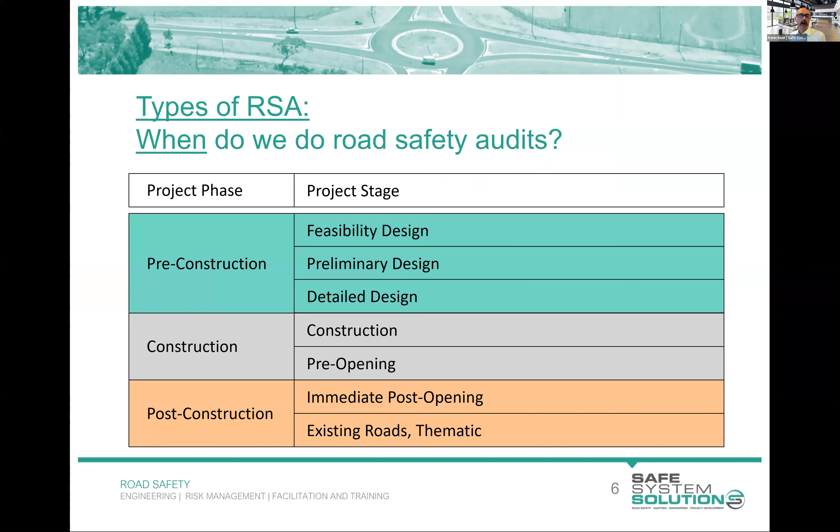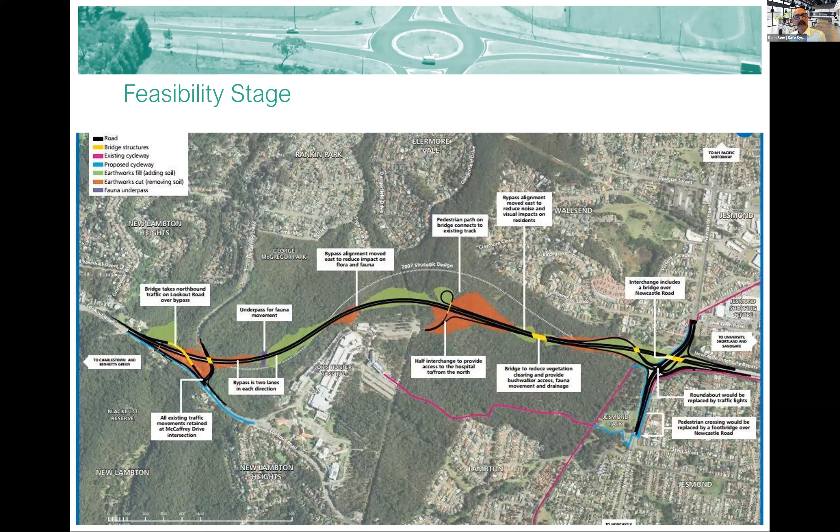And I took you through explanations of each of those, with the feasibility being the big picture planning type audit, where you don't often get much detail at all, but you're thinking about movement of people around here and different road users and the way this might change travel patterns and things that might just create a bit of risk there. Preliminary concepts, a bit more detail, and starting to get into thinking about these things. And the detailed design, obviously, you're given a lot of dense information.

Detailed designs, in one sense, are very hard to do the road safety audit on, because you've got to interpret all this technical information and work it out. But in another sense, they're kind of easier, because you do have the answers to a lot of the questions you might have at the earlier stages. If you're back here, you'll be asking lots of questions in your mind about lane widths and different drainage setups or lighting, and they just wouldn't have answered these. They wouldn't have got to that detail of thinking. So those could all be issues, but you wouldn't know. When you're in detailed design, you get all that information, but you really have to spend the time poring through the details of these designs and interpreting what they're doing and making decisions accordingly.

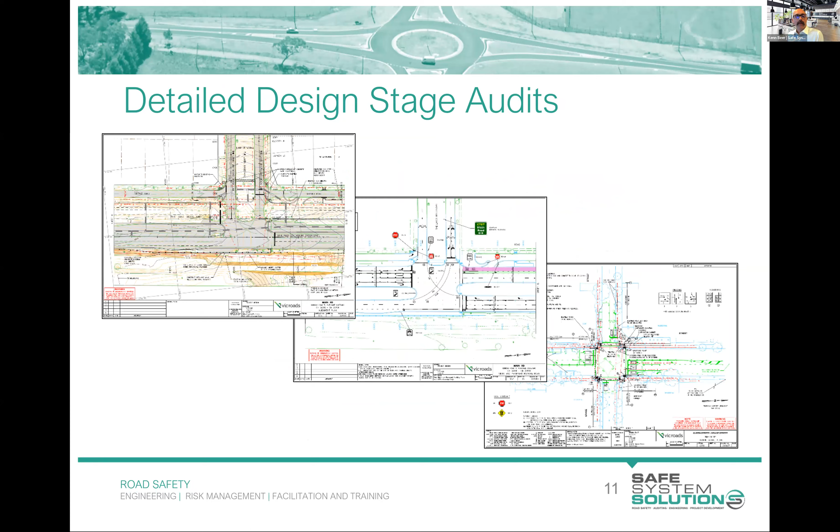This one I didn't have time to do last time. We were just talking about drivable culvert end walls, and the fact that we certainly know we don't want end walls like the top there in the roadside, because vehicles leave the road, they strike these, and we see some pretty horrific incidents. So we want to put in these drivable culvert end walls so vehicles, if they leave the road, navigate across that. But the little kicker is that there's actually two types of drivable culvert end walls. You've got one for the perpendicular and one for the parallel culvert. And so you can see the difference there.

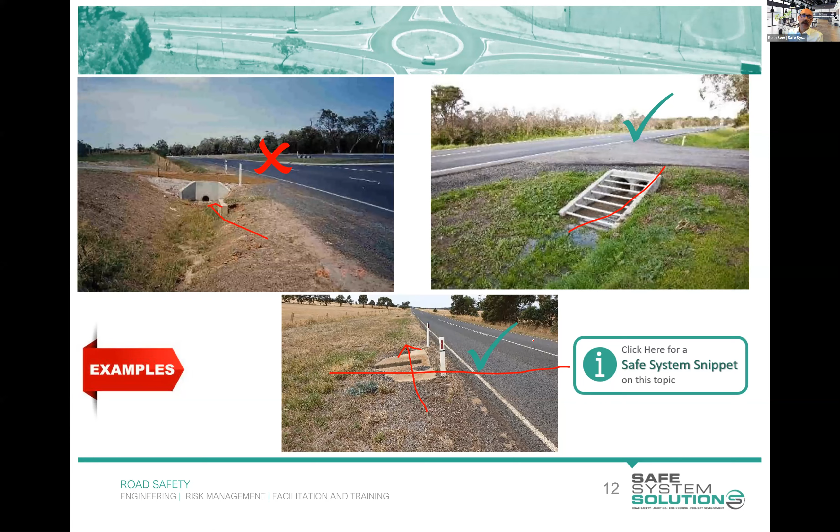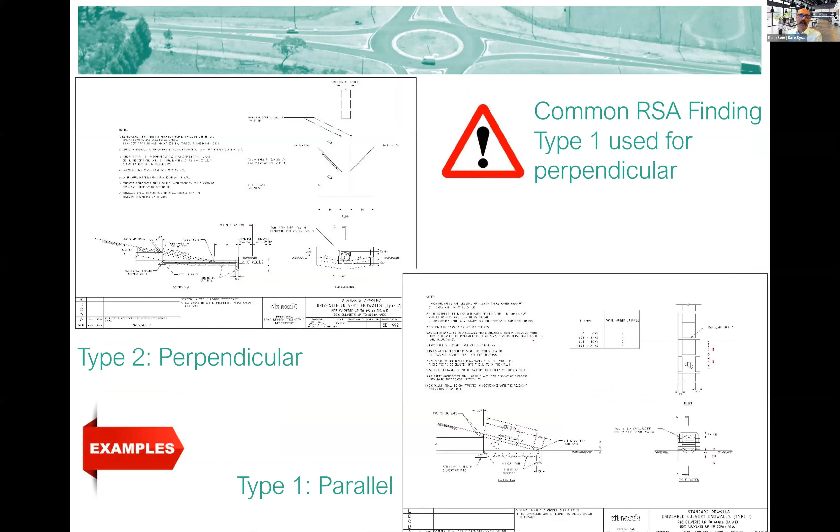They've got these ones correct, but you have that one for when your culvert's going across the road, and this one running parallel. But one of the really common things we see in detailed design is the choice of the wrong culvert in the design. And so the installers aren't really thinking. They just go and buy type 1 or type 2 as per the plan, and then they install it. But in road safety audits at detailed design, these are the kind of very specific things that you can pick up.

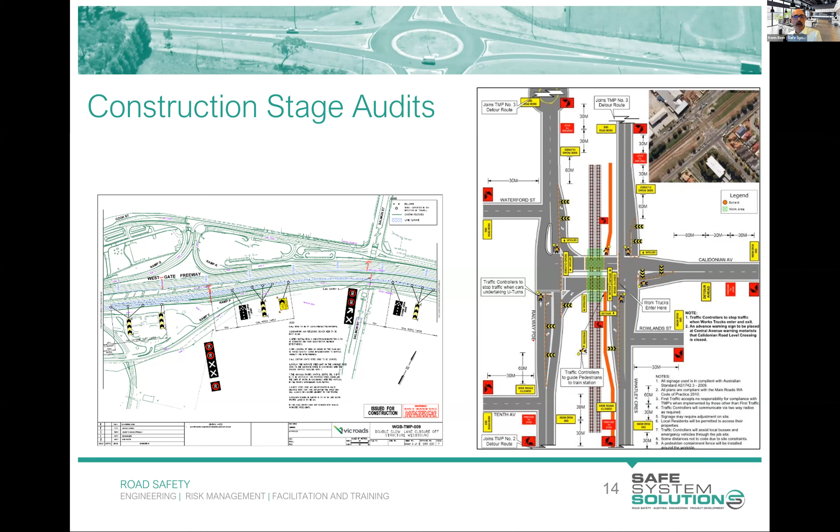Construction stage audits, as I mentioned, are really for the big picture, the big construction sites. If you're just doing a small bit of work on a local road and it's getting traffic management, I think it is just overkill to do a road safety audit, right? Unless there's some very risky thing, but really the surveillance officers and anybody out there managing the site should be able to pick up those things. But if you're doing big works on major roads and freeways and big, long-ish term changes, we really should have that full-blown road safety audit process through this.

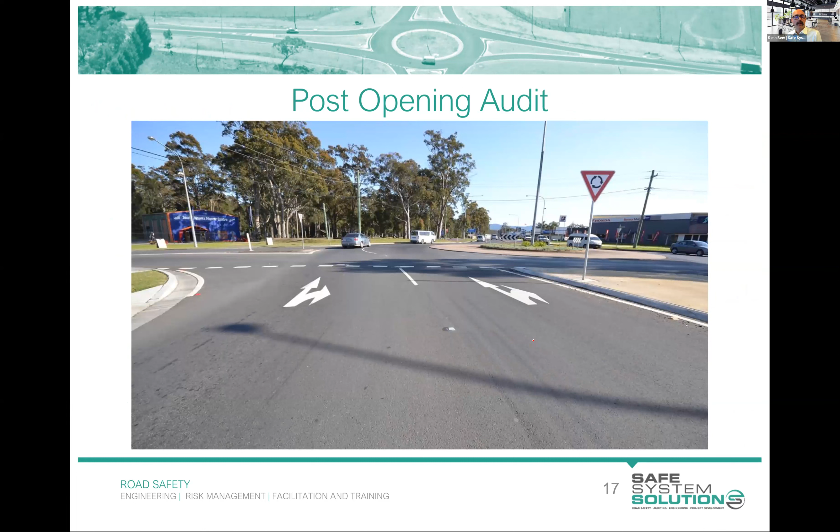Pre-opening, you're really checking a whole lot of things that have been installed and making sure that they're not going to present any issues, that they're installed correctly, but also that there's nothing that's emerged that was unexpected. And we saw this little one, which you picked up quite well there, the stencil the wrong way around. And I talked about existing conditions audits to finish it off.

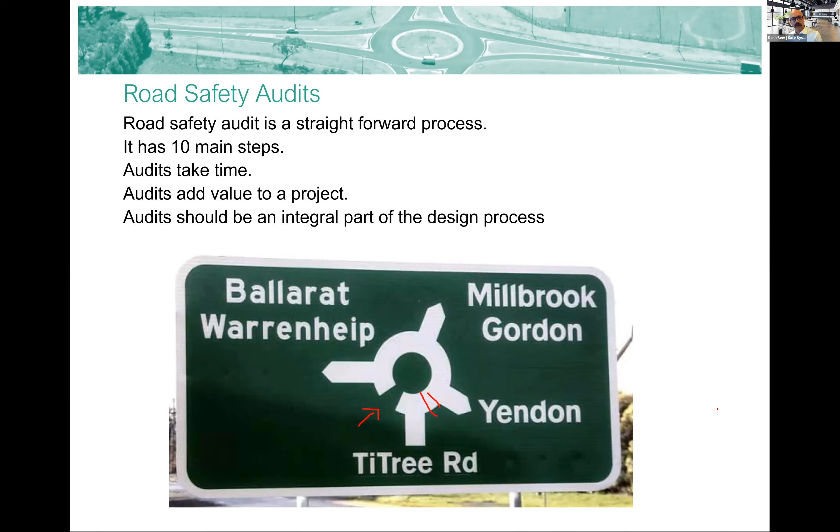Now, this is a very nuanced, specific thing, and I'll come back to this sign and talk to you about how we would think about this as a road safety auditor. Like, is this going to cause death and serious injury to our community? Probably not. Okay. But it's not right, and it's got some sort of implications. So let me come back to that. I'll come back to it in a bit.

The road safety audit process, I said 10 steps. Let's go. Let's have a look at the 10 steps. And they're pretty consistent internationally, these steps. Somebody selects the audit team, and that will be the client.

Officially, it's the end asset manager, and we'll call them the client. It gets a little complicated if you've got developer-funded works or you've got private road operators and the like. Essentially, though, whoever's going to be the end owner, manager of that bit of infrastructure goes and selects the audit team.

They then hand over all the background information. It could be designs, it could be traffic studies, it could be any other information that could be useful for the audit team to be able to do their job. Then there's some sort of discussion around that information, clarification. Do we know what we're doing? Do we have all the info we need?

We'll call it a commencement meeting. I mean, in practice, sometimes it's just a phone call and just a check-in. Certainly on big projects, you'd usually go in, sit down, roll out the plan, ask any questions. And then there's sort of looking at those documents and getting any final clarification. And then the audit team sort of takes all of that and off they go. Off they go and they do the road safety audit.

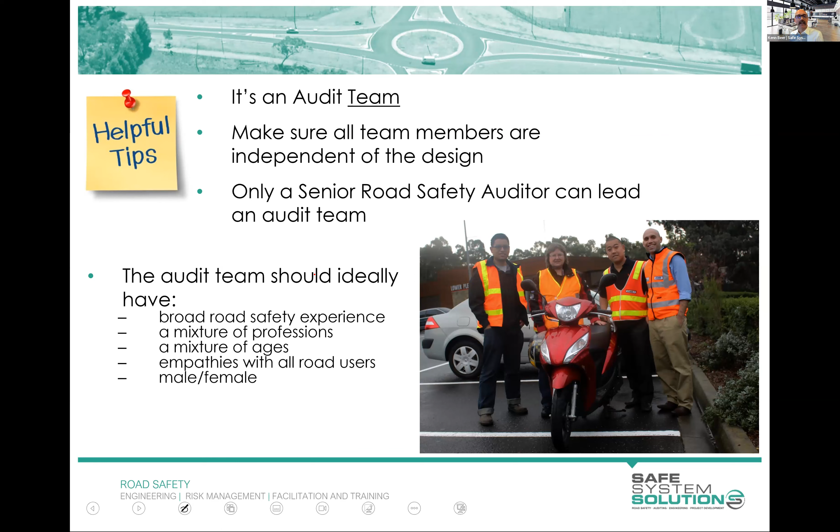So then the background information is handed over, and there's some sort of potential commencement meeting where we further discuss that, and then we look at all the documentation, and then we get out and we do the road safety audit, and we inspect the site during the daytime and the nighttime.

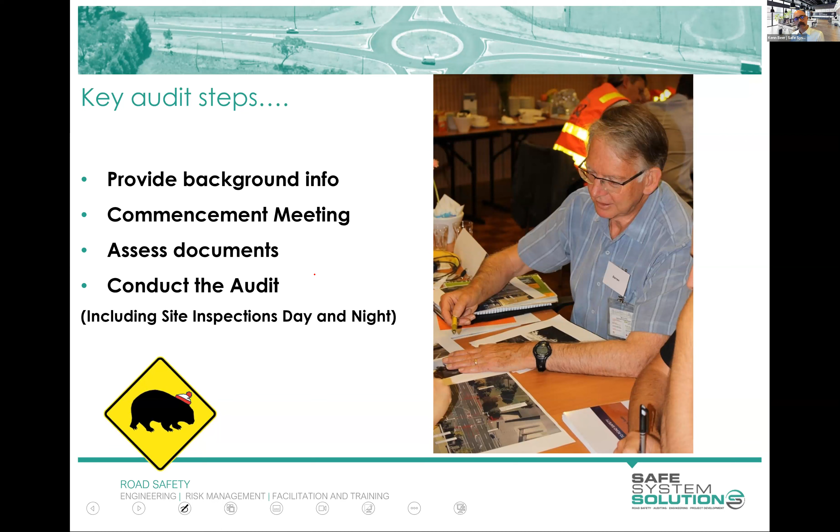Sometimes we have headlight glare in specific alignments that are either existing or that a new road will be put on, and we can get more feel for that at night. Sometimes the street lighting will create visual deceit in the way it lines up. Sometimes there's actual activity in the area that you didn't expect. It could be a nightclub area that you just didn't know was so lively at night without being out there.

Now, in an ideal world, we would look at this during summer, during winter, when it's raining, when it's sunny, day, night. But you won't be able to get out and look at all of these. So we say during the day and the night. And if there's a particular activity that you know of in the area, like a school or a footy stadium, if you can get there, school especially during drop-off or pickup time, to see how it operates then. The footy stadium, it's good to see it if it's a home game and how it interacts. Sometimes you practically just can't do that.

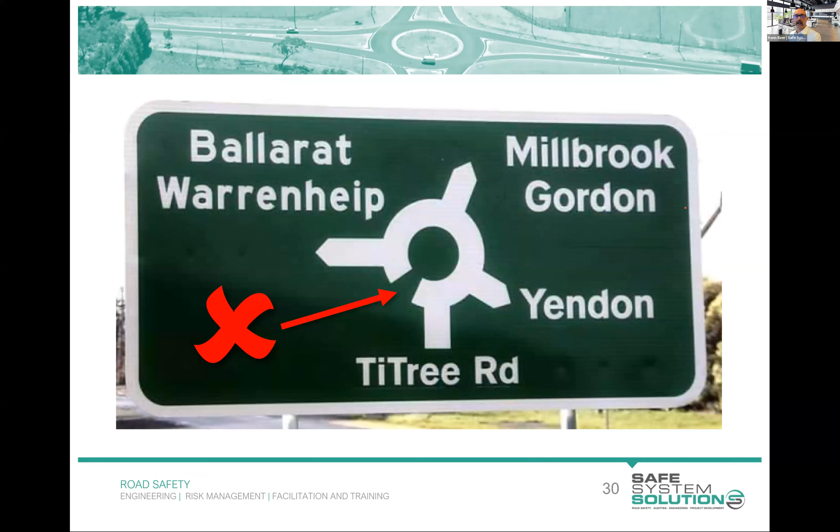Although, in what sort of situations in the road environment do you think the risk elevates a bit for this issue? Any ideas on that? I'll give a prize out. So if we see a design of this wrong or existing roundabout sign like this, where do you think maybe the risk's a little bit higher? I still don't think it's high risk, but a little bit higher. Any idea?

Okay, so we've seen some ideas on 2-lane roundabouts, where it could be confusing, and then we've seen airport. I like airport as examples.

So we've got a username here, 935649. It's like maybe a prisoner's joined the course. But yeah, okay.

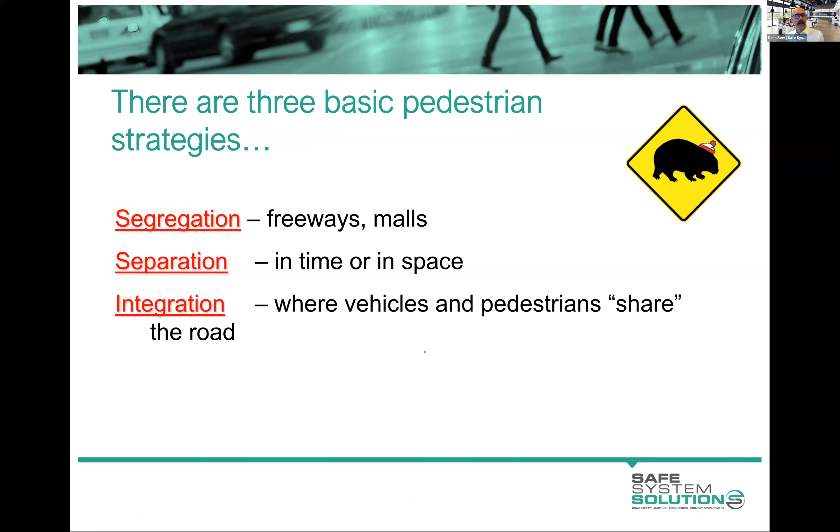So segregation: motorways, freeways, an obvious example of where this is being attempted, where we don't have vulnerable road users in that mix. Interestingly, though, if you do crash analysis on motorways, you do discover a surprising amount of death and serious injury to pedestrians. And the bulk of them, from my analysis of a few of these around the world, is people getting out of taxis late at night, getting out of broken down cars. So it's sort of that exit of a vehicle and then wandering or throwing up or whatever they're doing, often late at night, and we see incidents there.

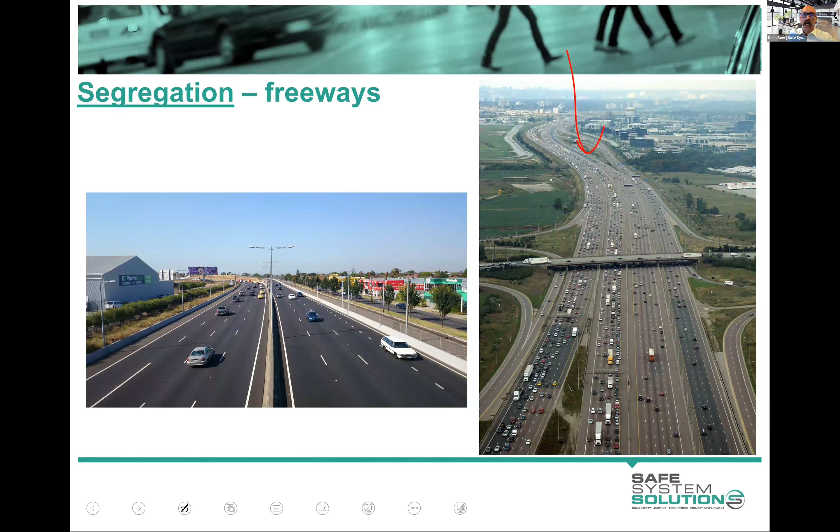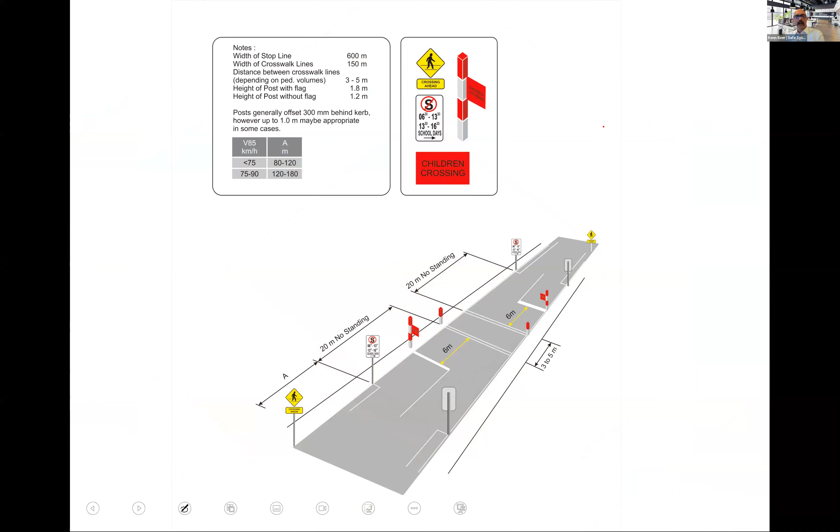Okay. The other way around is obviously areas where there are no vehicles, pedestrian malls, and the like. So we're segregating there. Separation in time is saying that a part of the road will be used at one point in time by pedestrians, at another point in time by vehicles. Obvious examples, school crossings, same thing. It's trying to separate it by time. And we have all sorts of different arrangements of this, and some interesting ways that we think about the safety of it.

Anybody know? I'll give a prize out for this one. What is the official term for a signalized intersection where pedestrians can cross all these different ways? Scramble is not the term. Okay, scramble crossing is the term that is used a lot, and I've got to give a prize for somebody saying scramble, because that's what Austroads will call it. It has another term. There we go. Barnes dance. Well done. Prizes there, one for scramble and one for Barnes dance. I don't know why it's called a Barnes dance. I assume Mr. or Mrs. Barnes came up with the idea, and that's what we've run with.

But somebody also said box treatment. That one's actually just a yellow box marked. We call that a yellow box marking. So I'll give a prize for that as well.

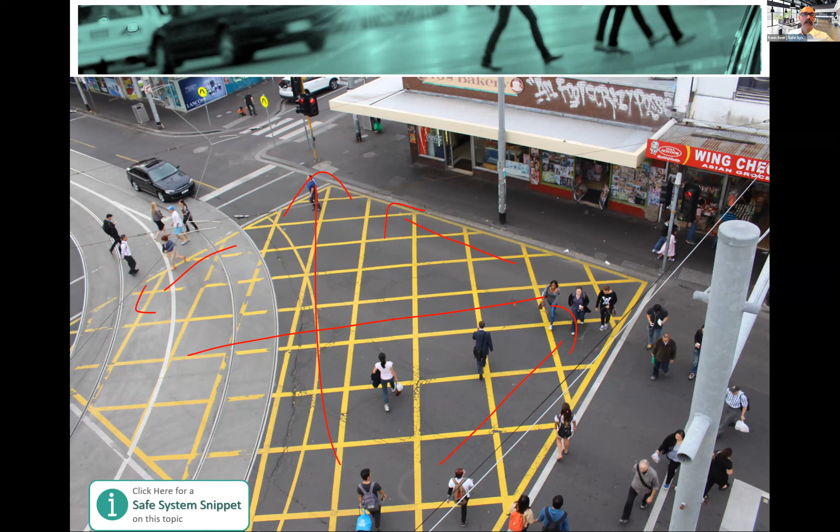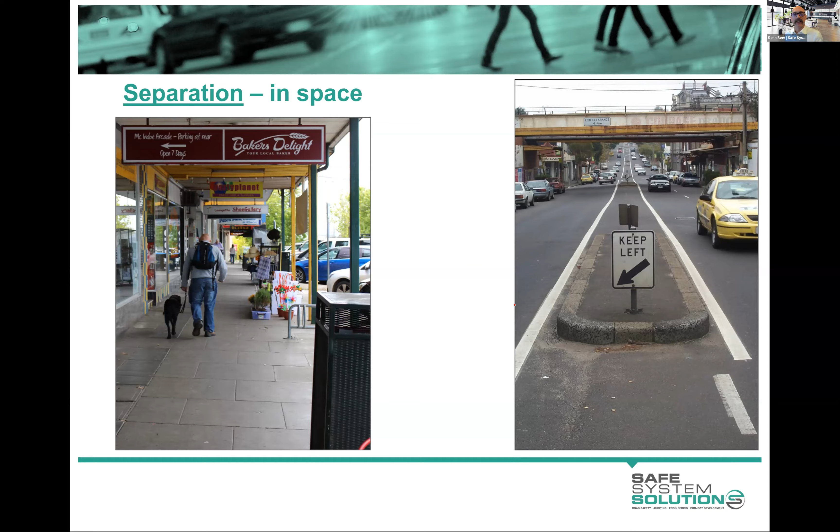Now, this sort of stuff might be things that we would recommend potentially, and they will do their traffic modeling to determine whether or not that's feasible if you think it would improve safety. Separation in space is about providing refuge islands, footpaths, sidewalks. At what point do we say it's segregation? Well, at some point you would say that. But as a road safety auditor, one of the interesting things to think about is, have we got enough space to store? If we're providing a refuge island or something like this, is there enough space to store?

Now, you can go to your different standards. So this one's from 1742. It's a little old, though. I better change this slide. I'm still using 1990. Okay. 1742 will give you that if you're in Australia. So you could use that.

But the easy rule of thumb for an auditor, better than actually knowing where the standard is and what should specifically be done, is thinking about: could a father or mother pushing a pram fit in there, or would they have to decide if their kid or themselves stands in live traffic? Or could somebody on a bike store in there? Or if there's lots of pedestrian crossing, is there enough space for multiple pedestrians to be in there?

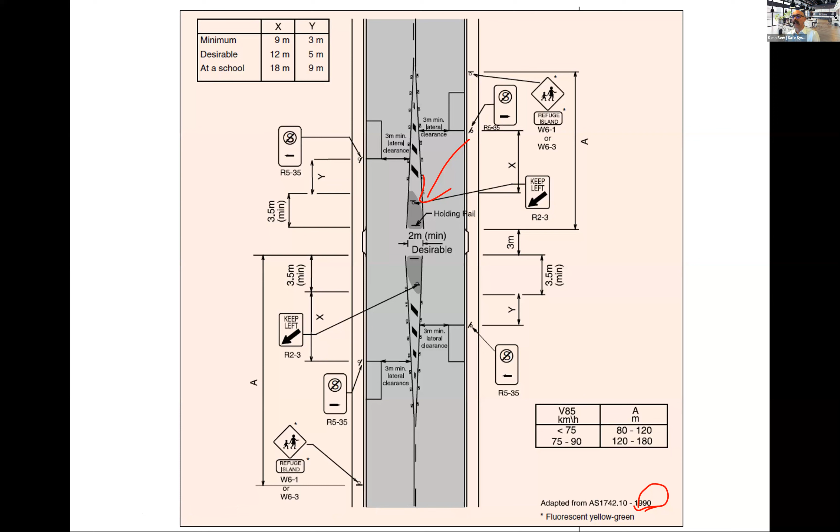It doesn't matter whether it meets the standard or not, right? If you're concerned by it, you report it. The standards might help you in gauging some of this if you don't have full clarity on it. We also want to think about mobility scooters. Can they store in there? So you've got some different road users to be thinking about.

Now, pedestrian overpasses and underpasses are considered part of that separation suite of treatments. But our job as road safety auditors is to think about how people are actually going to use this. And we really do know a lot of pedestrian overpasses are put in and they're not really used. Well, they're used by some people, but we still have a lot of people who just walk straight across the road. So our job as auditors, especially in the design stage of something expensive like this, is to think about how we can make sure people use this or encourage them to. Or can we do things to the road itself, because we're still going to have pedestrians crossing at grade?

We are the voice of sort of reality as auditors often. Designers can get caught up in thinking that everybody will do exactly what their intention of this design is, and go up this big long ramp that goes up and back and over there and all the way down there just to get across the road. Well, I know a lot of them are just going to go straight across the road.

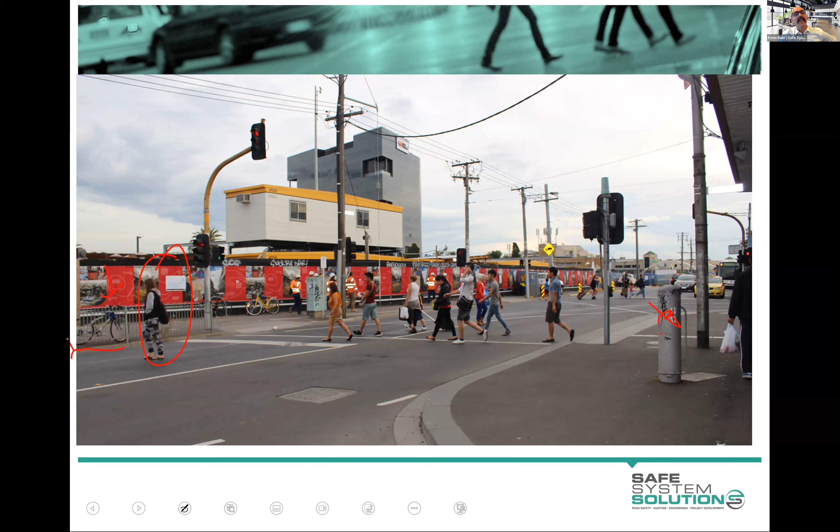The fencing there is not to corral them to a particular crossing point. It's just to contain them, and that's the same sort of reasoning you use outside schools as well. Kids running after balls or just playing, and they run out the gate, and we use it as almost a containment device in that sense. So that's good.

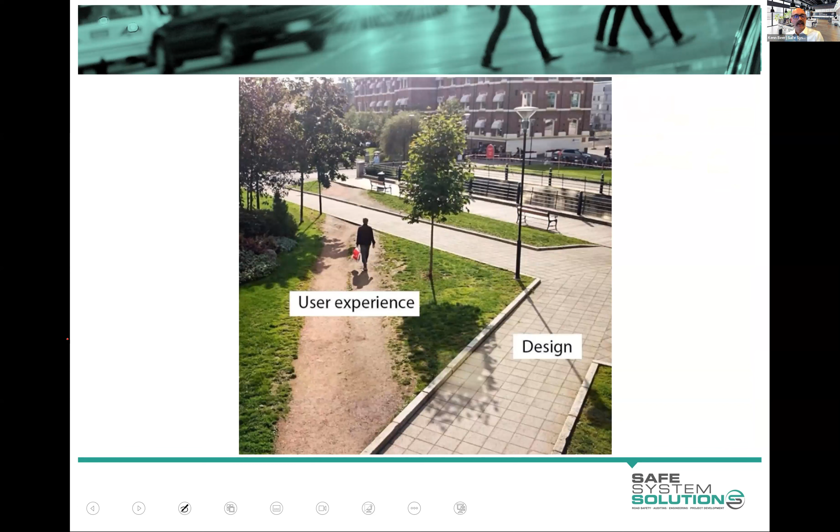Just be aware though, pedestrian desire line. I think somebody was explaining pedestrian desire line using this little meme. Are we going to call it? I'll call it a meme. And I thought that's pretty good. Yep. User experience and some more pedestrian desire lines where you can see them. All right.

Now, at a bigger picture level, and we see this more in developing countries than in developed countries, although our role as auditors is to always look at this: if we put a motorway or a major road through areas where people need to get from one side to the other, they're going to get from one side to the other. We need to ensure at those early stages we're creating pedestrian facilities, overpasses, underpasses, and that they're attractive and easy to use.

Some people often say to me, well, underpasses, from a personal safety perspective, that's a danger. Should that be reported in the audit report? And I'm like, it's a tough one. We don't report on personal safety issues, as in, am I going to be mugged in this area? But if it discourages people from using the facility and they will take the road, then we sort of report on it. Hope that clarification makes sense. Happy to elaborate on that if people are a little bit confused.

But we do see this, and it's very frustrating, where we'll have a major new World Bank funded, or one country funding a developing country to build massive new roadways through their country, but then they'll go straight through a township where they separate the township and it's high-speed traffic, but they're not providing these pedestrian facilities. And we just see skyrocketing death and serious injury for pedestrians through these areas as they continue to cross the highway, and also things like trade on the highway and all sorts of other challenges.

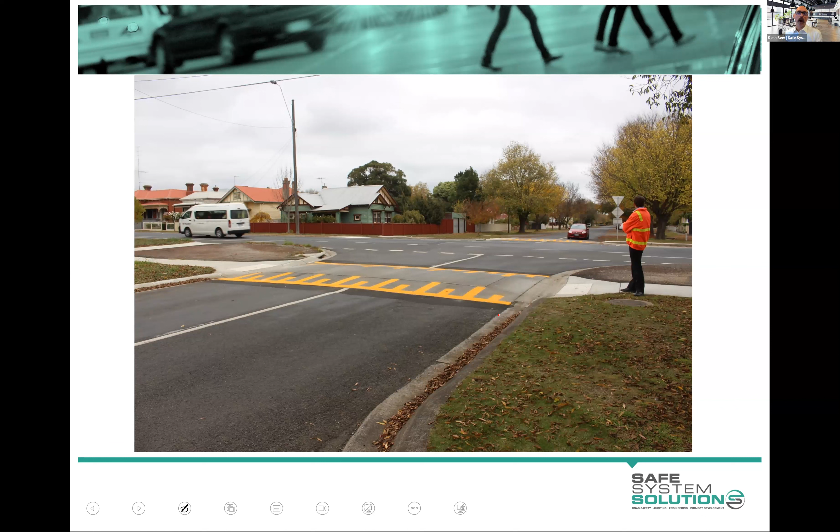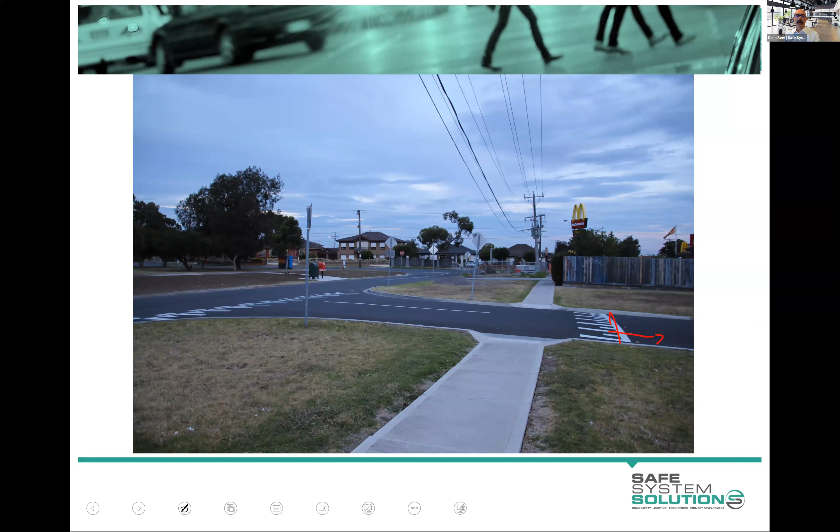And the choices could be to make it a formalized pedestrian crossing, or maybe alter it in a way that makes it still a raised threshold treatment, which is what it is. And they're very good because they do a wonderful job. But this is clearer. It's continuing road color. It's got a center line marking. This could be pushed back a little bit even, but that's going to be clearer that that's a road and we're going to cross it. Or you just make it a pedestrian crossing.

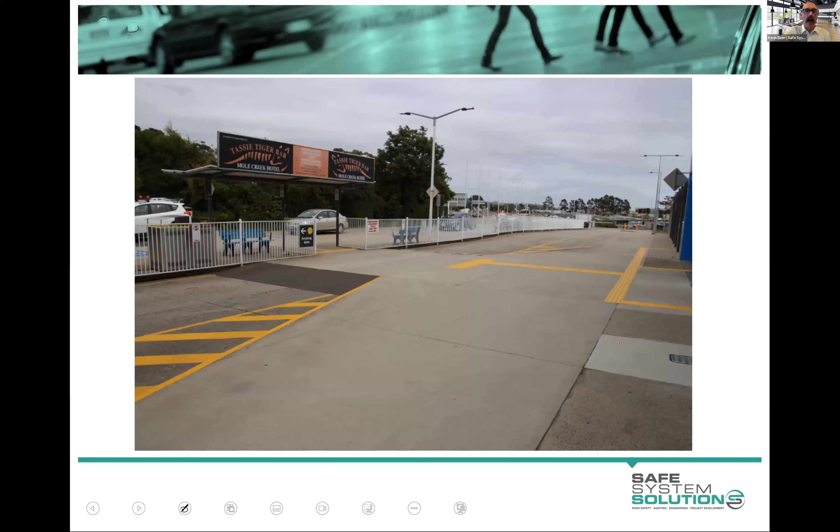And here's one from Launceston Airport. I could do a whole road safety audit course based on pictures from airports. I think because of their federal jurisdiction, they just abandon all good practices associated with roads in and out. But yeah, really unclear. You get off the plane and you're going out to somebody waiting for you or the like, and at this point, it's actually technically vehicle priority through there. It's really unclear. The biggest saving grace here is that it's raised, so that'll slow things down,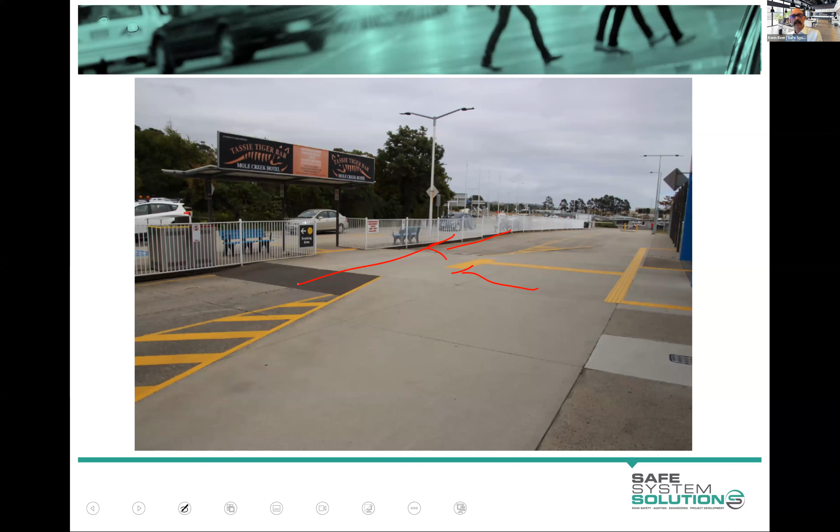but it's not clear at all. And we see this emergence of people saying, oh, well, this is where we want people to cross, so we'll highlight it, and maybe vehicles will slow down because of some courtesy, and they're actually called courtesy crossings in some countries. Yeah, it just breeds a confusion of priority, which is not required. Either make it dedicated pedestrian priority or keep it at road color, line mark it with the center line through it, make it very clear that a pedestrian needs to look for vehicles. Either way.

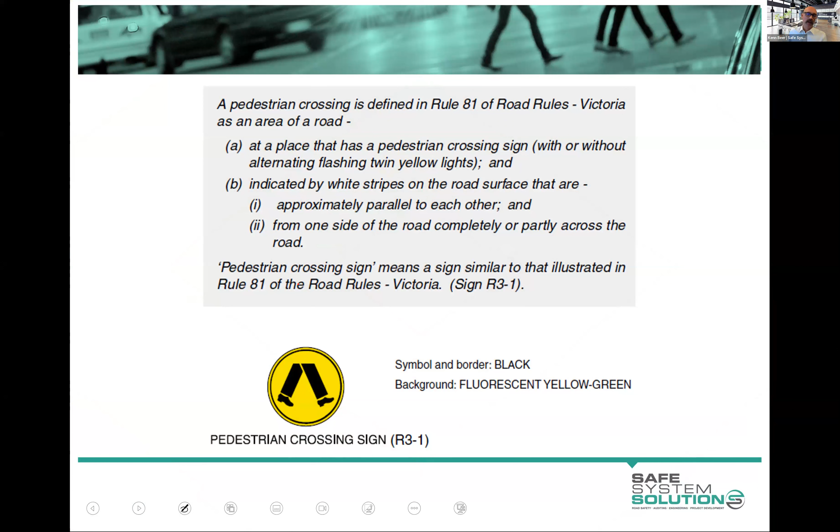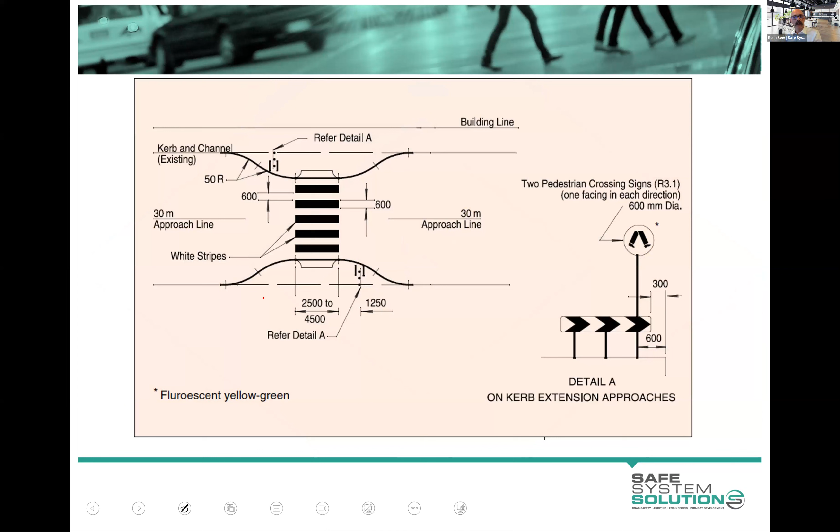And in Australia or Victoria, we're going to be needing the pedestrian walking legs signs to give it legal priority, and the markings on the road. This one doesn't have the markings on the road. It should have markings on the road. But that's the legal status of it, it should have all of this marking. And that's then nice and clear for everybody. That's pedestrian priority.

Here's just some incorrect signage. I'm not understanding what the signage is. And these are things auditors can pick up. They're trying to use warning signs at pedestrian crossings as directional signage for pedestrians to walk in these areas. Just incorrect signage. Is that a big road safety issue? No. Does it annoy me? Yes. Would I put it in an audit report? Probably just as a note somewhere. Hey, this is wrong, because I can't really connect that to somebody being killed or seriously injured in the future.

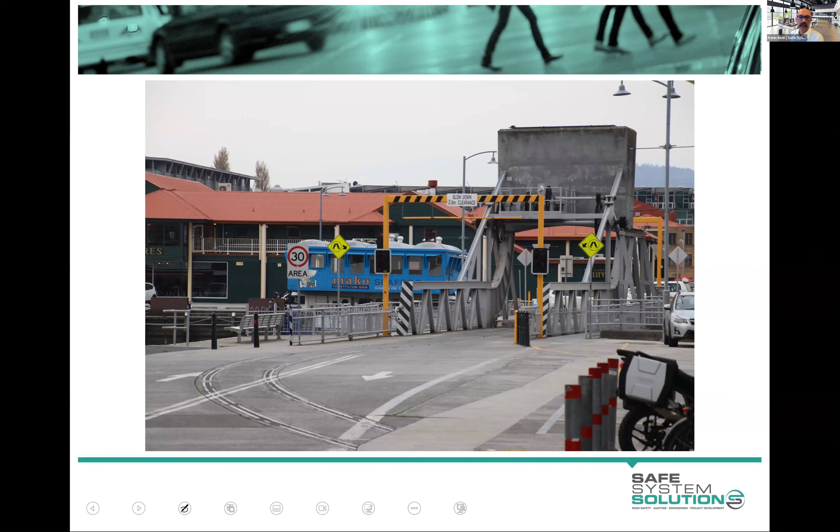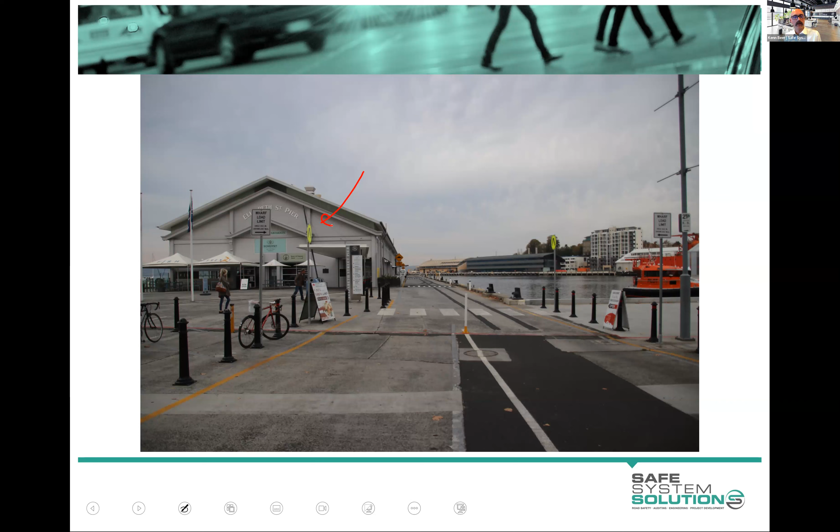This one, on the other hand, potentially. They've put the regulatory legs signs facing the pedestrians. And obviously they thought, well, we need to tell the pedestrians where they should cross. But of course, that's for drivers. Now, you sort of question the installers of the sign as to what on earth they're doing. But this stuff does occasionally slip through the net. So auditors can, in those post-opening audits or existing conditions audits, pick up stuff like this, which we really want to report on. All right, little one for you. Here's a pedestrian crossing.

It's okay. Don't worry about all these sort of line markings on the road. They're trying to make their street more active and the like. But let's forget about that for now. Let's concentrate on the crossing.

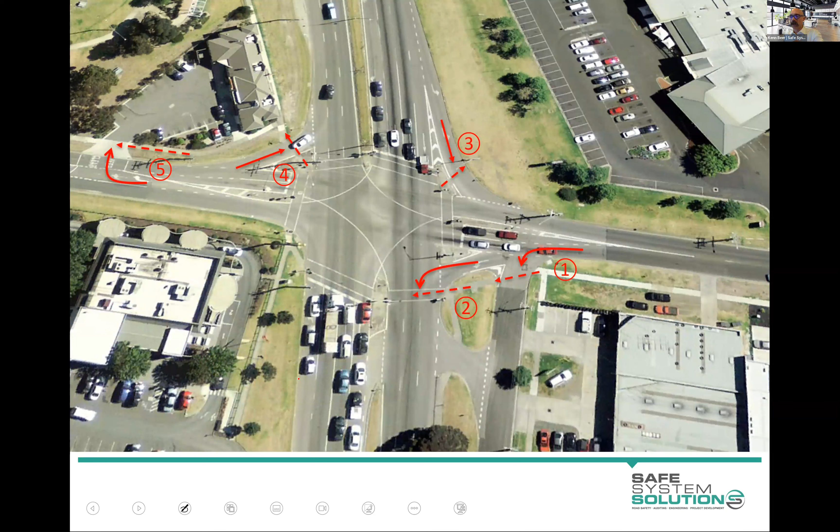And then I'm going to get you to, I think, we might have a vote for this one, a poll. If we don't, we'll just type it into the... Yeah, we do. I'm just bringing that up now, actually. Okay, well, don't make it live yet, because I'm going to explain this. Okay, people are already wanting to write it in. Maybe put the poll up because they're going. Okay, let's launch the poll for the eager beavers. All right. You can move the poll around, just grab it as I talk to this.

So each one of these is a little crash diagram. And I want you to say 1, 2, 3, 4, or 5. The solid line is the vehicle, the dotted line is the pedestrian. That's pretty international actually in crash diagramming, that you'd use a dotted line for a pedestrian and a solid line for a vehicle. So you can see 1 there is a vehicle turns into the service road, pedestrian crossing gets struck. 2 is vehicle turning left out of the slip lane, a pedestrian crossing struck.

3 is from the island across the slip lane, being struck by a vehicle. 4 is the same as 3, except on that different side. And 5 is a vehicle turning in and pedestrian walking along the footpath being struck. So we're talking about 6 crashes of the same type at that location. And people are putting their ideas in. Perhaps some people were swayed by the chat already, who knows?

Location 1, getting that a little bit more. Okay, if the poll hasn't popped up, feel free to type in the chat. We'll give it another 20 seconds, 10 seconds. All right, I might end that poll. Let's have a look at the results. Ooh. And so most people are going for location 1. I think some might have been swayed by people in the chat there. We've got 4 people for 2, 5 people for location 5. Okay, let's get rid of the poll.

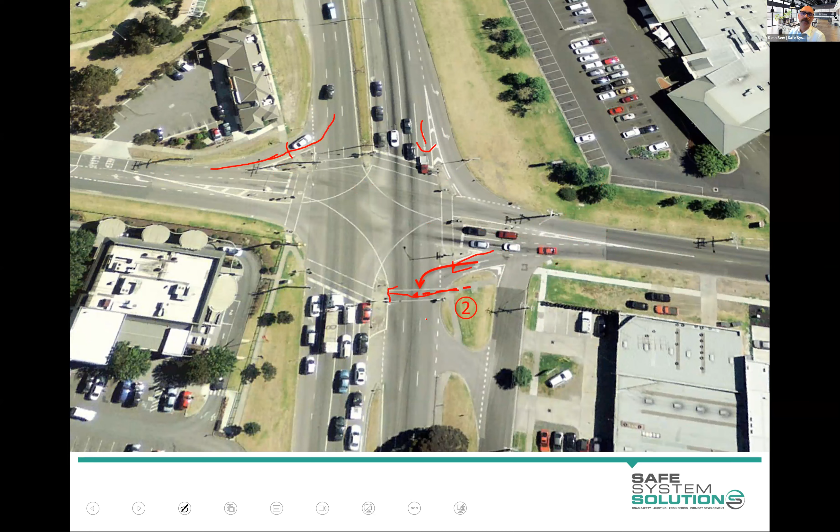Again, change now. That's how it should have looked from the start. And you can see there the crossing going into the island and then out as it should. I mentioned get out there when there are different times of activity. If you know there's going to be lots of pedestrians at certain times, try and have a look at it, how it operates at that time.

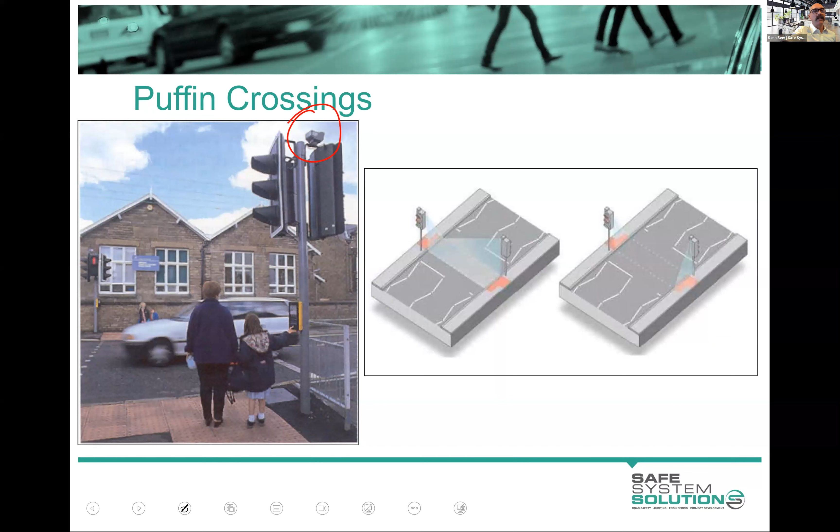In terms of making recommendations, lots of things we can recommend and a few pedestrian specific facilities. We've got puffin crossings. So it's a pedestrian user-friendly intelligent crossing. Somebody at some point went on a bird theme and everybody stuck to it in pedestrian crossing facilities. So puffin. So these are essentially these little devices which, like when you walk up to a house at night and the lights automatically come on. Well, this is the same technology. It just keeps the lights red for vehicles if there's movement on the crossing.

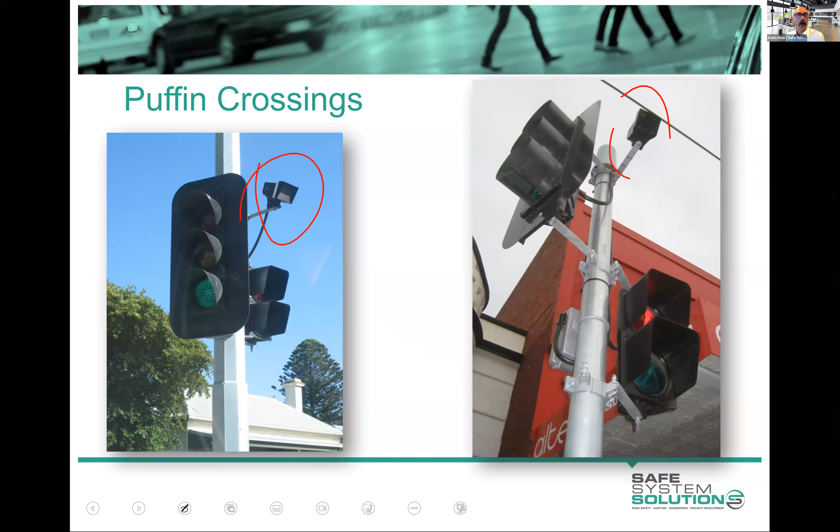And you can retrofit those to different pedestrian crossings. So you might recommend that if you've got concerns with long crossing distances and older people crossing or the like that may be a little bit slower. Toucan crossing. This is very Australian. Oh no, the UK does this as well. That's a pedestrian and cyclist, so it's like a sharing the road crossing, and you put two symbols up. Toucan crossing. I'm not making this up.

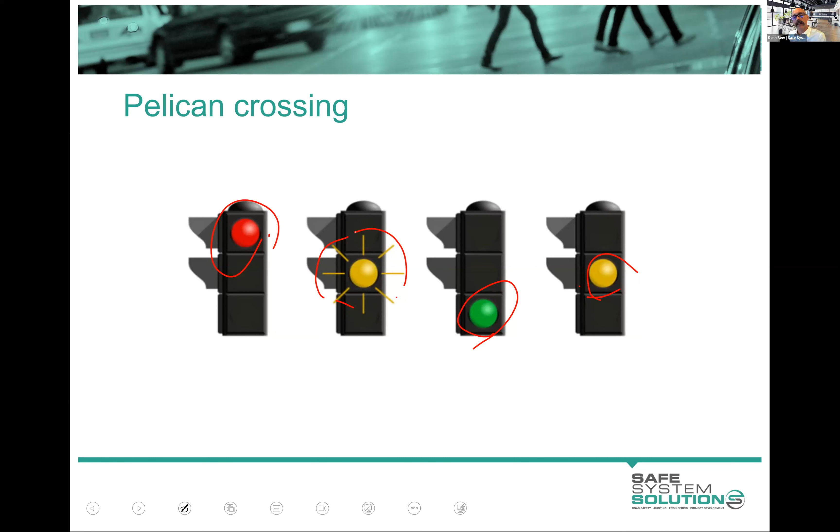That's its actual term. We've got pelican crossings, which are crossings which the driver will see green and then orange and red, and then the pedestrians cross. But then it goes to a flashing amber for a while, just to let any straggling pedestrian cross. So they're pelican crossings. There's a sign that was on like World's 100 Funniest Road Signs. Makes complete sense to me. Humped pelican crossing.

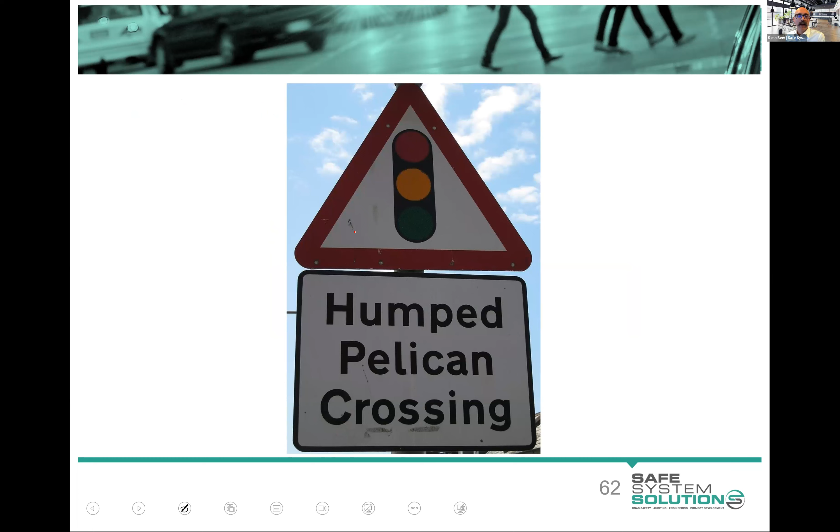Pegasus crossing, which is again a nuance that a horse is a vehicle, so you've got a sign that it can go, and plus the rider is up at that height. So yeah, I just chuck that one in for a bit of fun for you, really.

And because I can tell you some exciting facts about horses and riding in Australia. If you ride a horse when you're intoxicated, it is drink driving. Although if you ride an intoxicated horse, you're okay. Marissa's heard that one many times. She's groaning now, even though she's on mute. I'm still laughing. I'm still laughing.

Okay, it probably means it's time to start winding it up. One thing I haven't mentioned to you, though, is that in the Austroads Guide to Road Safety Part 6, Road Safety Audit, at the back, we have these things called prompt lists. They're just lists of a whole lot of questions that should prompt your thinking as a road safety auditor. They are not a checklist.

By following every one of these, you're not covering off everything. You've got to logically look at it. A lot of these won't be relevant. But there is one, H6, that's walking and cycling. So you get lots of questions that ask you these things. That's going to help you, especially as a new auditor, with lots of questions that prompt your thinking. You go, oh, okay, I didn't think about lighting, or I didn't think about pedestrian desire lines, or these sorts of things.

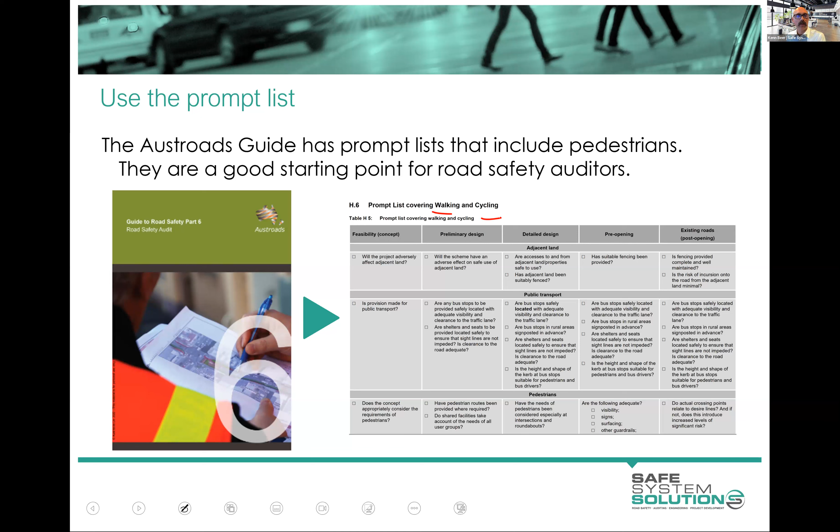So we've got a copy of Part 6 in there. It's free, like all Austroads documents are free. You just need your user login, but we'll provide you with that. You can have a look through that when you're doing your road safety auditing. I don't think we've got a quiz at the end of this one. I think we took that out to give people time to do their assignment, unless I'm wrong.

Would that be on the polls? I think it would have been a poll if we... Let me have a look. It's the 3 infrastructure strategy question. Is that the one? Oh, okay. Pop that one up. Let's see what we got. Like Christmas. Okay, can we see that?

Yeah. Which of these is not one of the 3 infrastructure strategies for pedestrian safety? Well, we did 4 infrastructure strategies, but anyway, so my question needs updating. Yes, it does. Okay. Anyway, give it another 5 seconds and then let's jump into the learning management system, Marissa, and just show everybody what they are going to do. Sure. Let's end the poll because I think everybody's onto it. So prevention is not one of the infrastructure strategies. Segregation, separation, integration are the 3. Actually, that is correct.